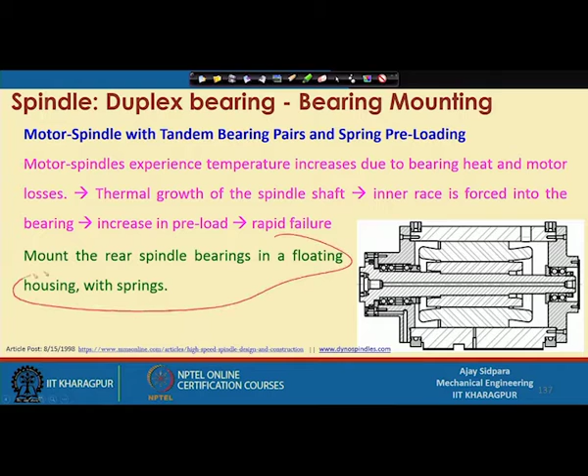In the last class we saw that whenever there is high temperature rise, heat is generated, and because of that heat generation there is growth of the spindle shaft. So we have to do something new, called the floating housing with a spring. Let us see this in detail.

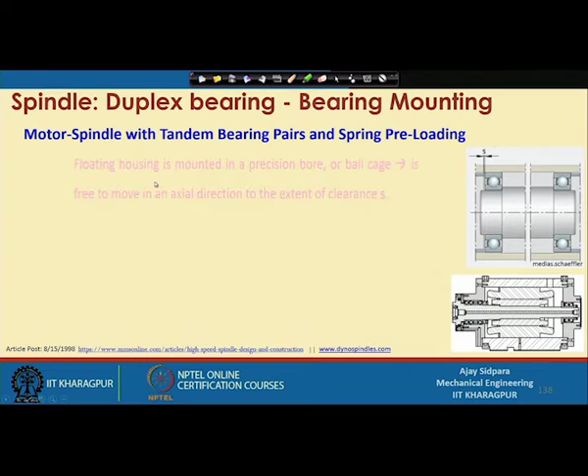This is the same configuration here. Now what we have to do is mount the floating housing in a precision bore or a ball cage, free to move in axial direction to the extent of clearance S. This is called the clearance S.

This clearance is given to the rear end of the housing. This is the front end, and this is actually the opposite, the rear end. Our tool is located at the front, and we give a small amount of clearance at the rear direction, because we have to provide this additional space so that whenever there is thermal growth of the shaft, it will be accommodated within this dimension. So you will not get any extra loading, compression, or expansion of components during operation of the spindle.

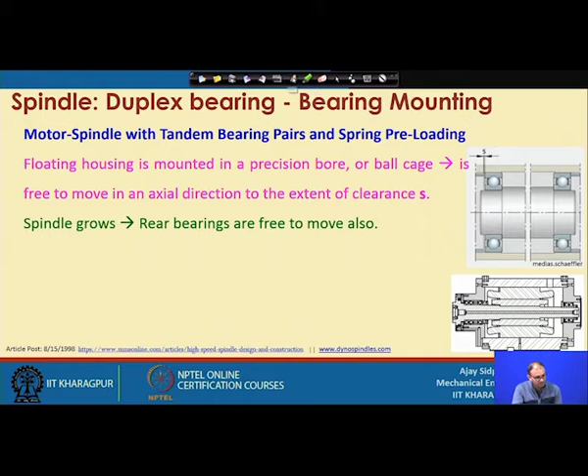So when the spindle grows, the rear bearings are free to move also. This is like the cantilever example we saw, where one end is fixed. This end is fixed because we are using a cutting tool here. If there is expansion in the cutting tool direction, your Z axis will be compromised because the Z axis offset will change. So we are not doing anything at that side; this whole bearing is completely firm and rigid.

So expansion will happen at the rear end only, meaning your rear bearing is free to move. Whatever this S is, that much amount of space is available for the rear end to move in that direction.

In this way, the preload seen by the bearing does not change, and it is maintained by the force exerted by the spring. We are using spring preloading here along with that gap. Whenever there is expansion, the spring will be further loaded, and that is compensated. Once the temperature comes down to the required level, the shaft will again contract, but since you have a spring loaded here...

...the spring again gets released and maintains the original position, but it should stay within this S value, which is only a few microns. That much variation is acceptable for this type of setting.

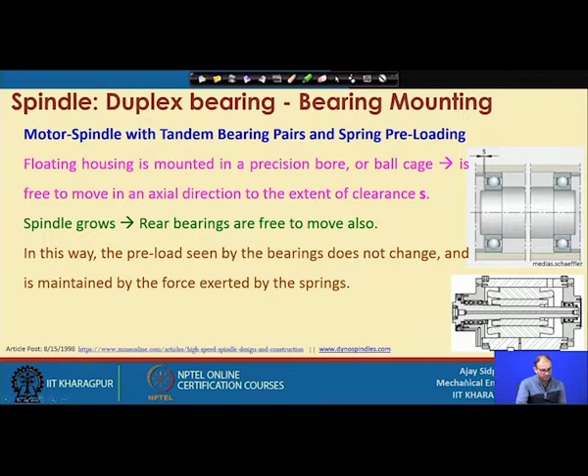This is used for high speed milling spindles and grinding spindles, because here we do not want to disturb the system due to heat. Heat is one of the things we have to maintain or regulate so that there is no thermal deformation of the component or tool, or any geometric inaccuracies.

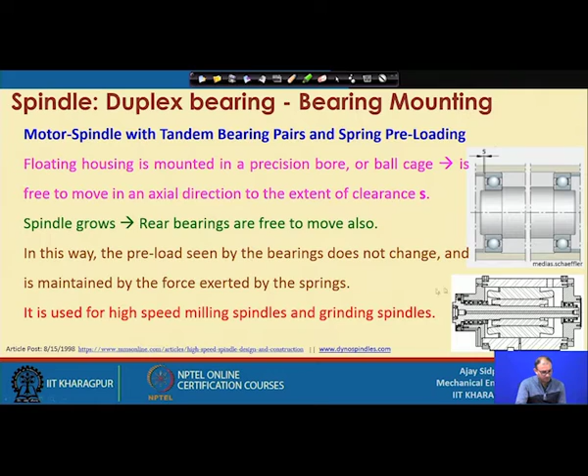Now coming to hybrid ceramic bearings. Till now we were discussing ball bearings where the races are made of steel, and the ball is also made of steel in case of ball bearing.

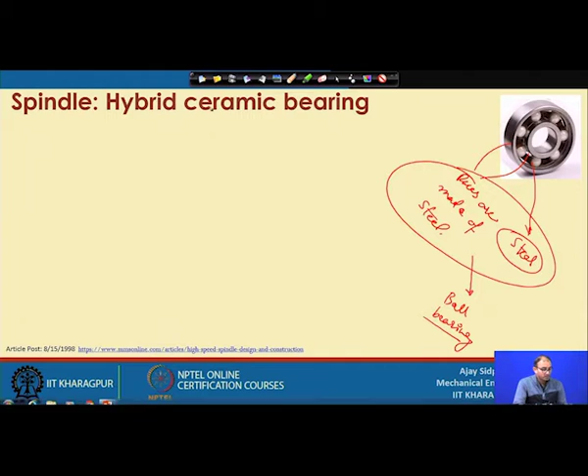But now we are talking about hybrid ceramic bearings. Why hybrid ceramic? Because we are using a ball of ceramic material, while the race is made of steel. That is why it is called hybrid ceramic bearings.

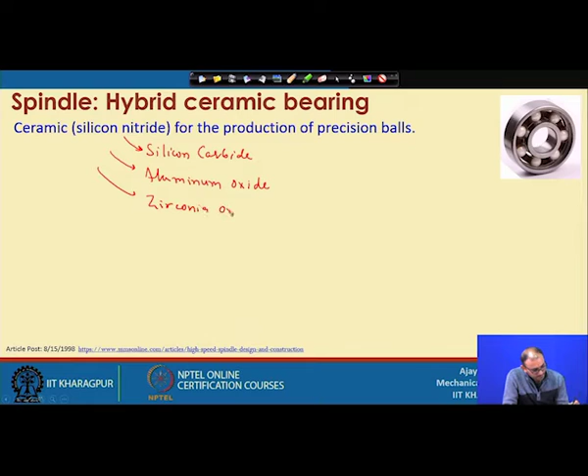Ceramic silicon nitride - not only silicon nitride, there are many other ceramic materials used. Silicon nitride is there, then silicon carbide, then aluminum oxide, and zirconia oxide is one also. So these are the different types of ceramic materials which are mostly used for fabrication of these precision balls.

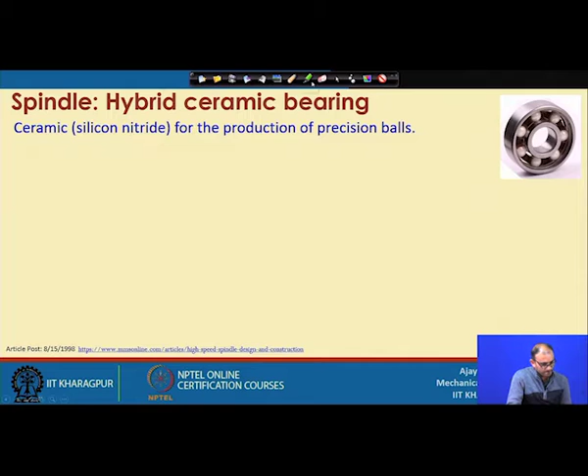Ceramic balls are 60% lighter than steel balls. So why is this important? Because we know that if things are lighter, you can actually increase the speed beyond a certain limit.

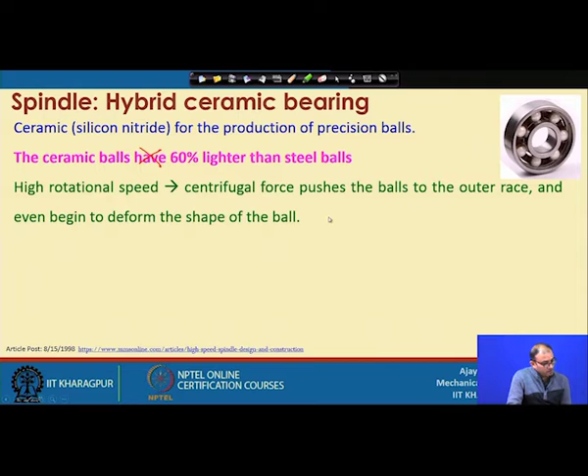For high rotational speed, centrifugal force pushes the ball to the outer race and even begins to deform the shape of the ball, because centrifugal force Fc we can write as m omega square r. So this is the radius, this is the speed, and this is the mass.

We are not actually doing anything with the radius - the size is the same, so this r is not changing. We are not changing the speed either, so omega, whatever rotational speed there is, remains the same. But we are changing the mass - now it is 60% less weight.

Now if you use centrifugal force with the steel ball, what is going to happen? You have a ball here, and when rotating, it will go in this direction. So what is happening is that centrifugal force pushes the ball onto the outer race.

So you have this ball, and it will be moved toward this particular part because of the centrifugal force. You have the outer race and the ball, and this ball is striking in this direction continuously pushing. So you get additional force on the top part of the inner face of the outer race, and because of that you get deformation of the ball.

So which one is actually creating problems? Sometimes it will deform the ball, sometimes it will deform the outer race. That is the reason for problems in the particular ball bearing. Whenever using a ball bearing, it will create a problem with the outer shape of the ball or the surface profile of the outer race.

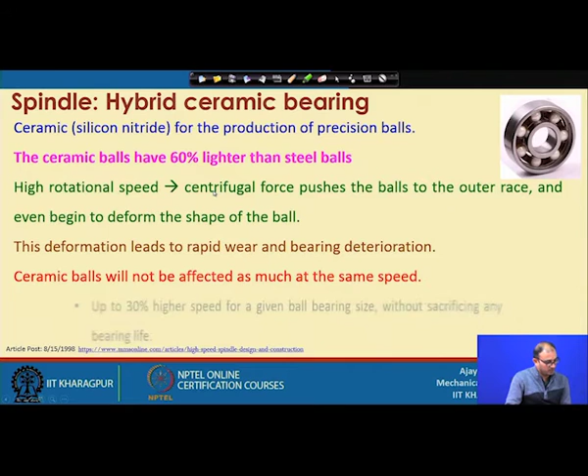So now you know you can expand that particular speed range. Earlier the range was fixed or limited, but now you can expand it to a certain higher level without creating any problem. By using a ceramic ball, you can go up to 30% higher speed for a given bearing size without sacrificing any bearing life.

So what does it mean? Without changing anything, just by replacing the steel ball with the ceramic ball, you can increase the speed by 30% without changing anything else. You keep the application everything the same, and you will still get the same bearing life but with increased speed. That is a very good advantage, because in micro machining our speed requirement is very high, and this is one of the best ways to achieve this without changing many other things.

You can see here that we have just changed the balls only, but we are still using steel. That is why it is called the hybrid ceramic bearing. But bearings are also available that are fully ceramic bearings - these are called...

full ceramic or complete ceramic bearings. If you see here, the race - outer race, inner race, everything is made of ceramic. If you consider this, whatever advantage you get for the hybrid bearing will be even higher in this case.

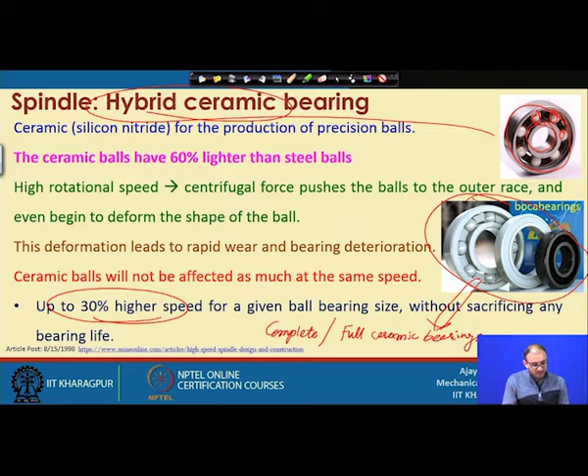Let us see those things one by one. So one thing is that they are lighter.

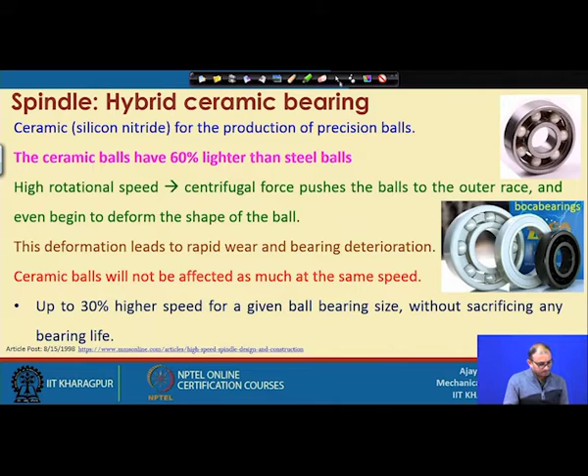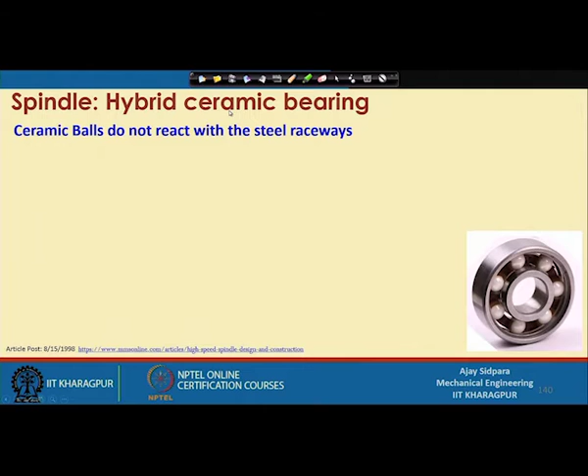And second thing is that ceramic balls do not react with the steel races, because these are ceramic material and mostly they are inert with the other acidic environment or some other things. So that is the big advantage here, because when you are using a normal ball bearing, what was the problem?

One of the most prominent mechanisms of bearing failure is the surface wear created by microscopic cold welding. What is this cold welding? When you have a normal ball bearing, what happens when you rotate at extremely high RPM? These are the contacts, mostly point contacts, but there are many point contacts depending on how many balls are located in that particular bearing. So when you are rotating at extremely high RPM, there is heat generation, and because of this heat generation, it cold welds with the inner races and outers. Cold weld means it is not like a permanent welding, but a temporary attachment between the ball and inner races.

So it is a temporary attachment of ball with races. It will temporarily attach because of this extremely high speed and high heat generation, and that is creating a problem, actually causing some type of removal of material. In this condition, if you continue this operation, this weld will break at a later stage when operating, and when the bearing rotates, this weld will be removed, creating surface roughness, which leads to heat generation and bearing failure.

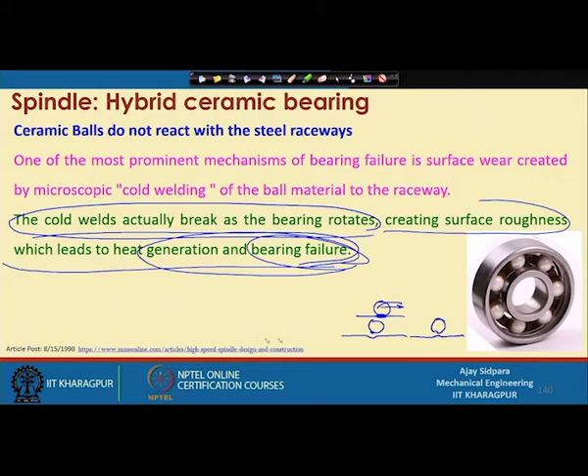In both cases this is the problem, but it happens microscopically, though it is still enough to create damage to the ball bearing, and finally everything fails at a later stage. Ceramic materials drastically reduce this mechanism, resulting in longer bearing life, because ceramic is a different material with different properties compared to the metallic surface. So it will not create this type of cold weld between the races and the ball. That is one of the advantages.

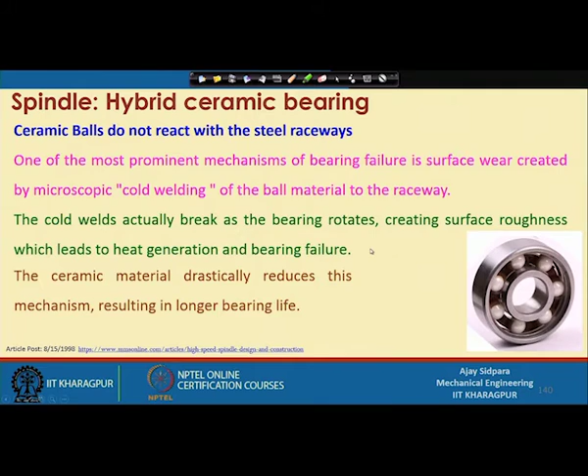Ceramic ball bearings operate at a lower temperature because they are mostly near perfectly rounded, almost like a glass-like surface. It is a glass-like surface, very shiny, and looks almost like glass. So you get very tight tolerances in terms of roundness and surface roughness.

So it operates at a much lower temperature than the steel ball, because polishing of the steel ball is very difficult compared to the ceramic ball. Dimensional accuracy is more controlled in the ceramic ball bearing, and because of that you may not get a higher temperature zone. So it will operate at a much lower temperature than the regular ball bearing.

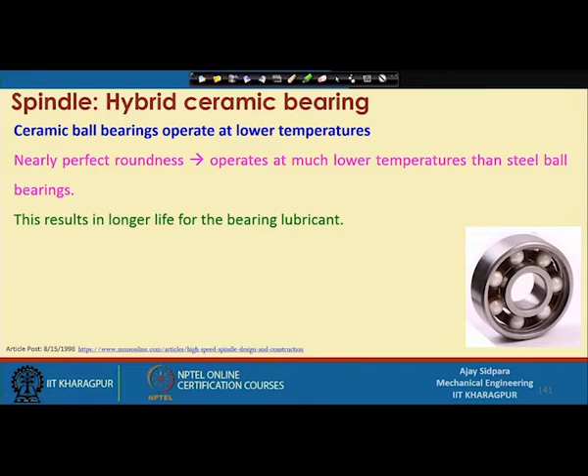This results in a longer life of the bearing lubricant, because wherever you are using bearing lubricant, if the temperature is very high, the lubricant will change its property, mostly its viscosity. Higher temperature leads to lower viscosity.

Because of that, you are changing the property of the lubricant, and sometimes the lubricant becomes ineffective in the complete dissipation of heat and reducing the friction. So it will not create a problem if you are using a ceramic ball instead of a steel ball.

So less friction is generated in the bearing, which increases with increase in heat. So when you go higher and higher in terms of speed, it will generate heat, but it will not create so much friction in this case, because now the systems are different, not a steel bearing.

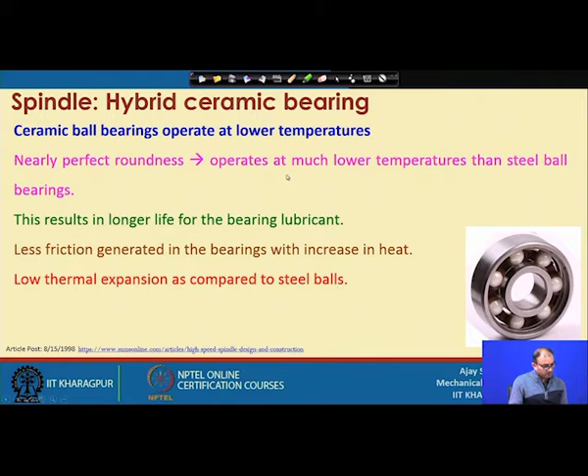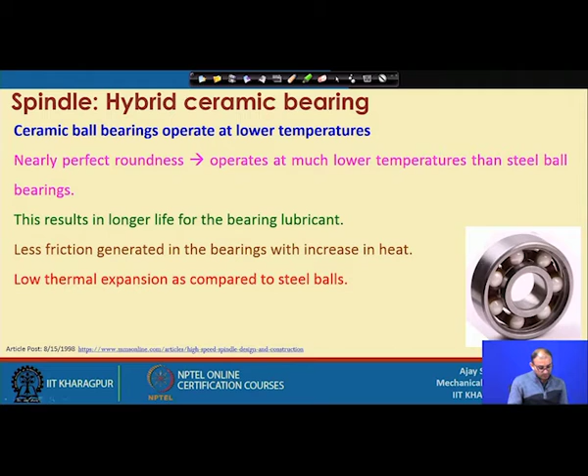Low thermal expansion as compared to the steel ball, because ceramics have a very low thermal coefficient of expansion compared to steel. So even if there is high temperature, you will not get thermal growth of the system, that means the different components of the bearing. So that is also an advantage.

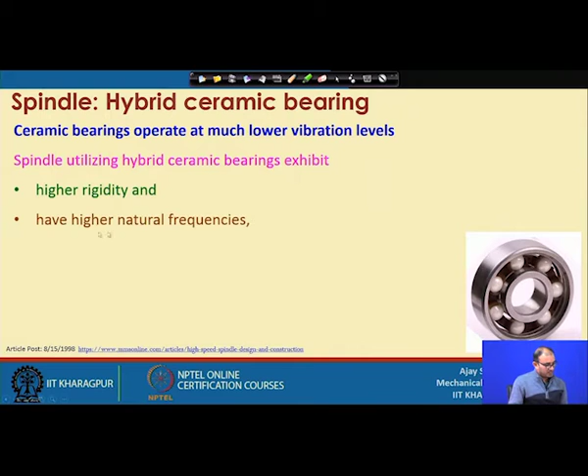They operate at a much lower vibration level, because spindles utilizing hybrid ceramic bearings exhibit higher rigidity, because they are very strong in terms of mechanical properties, and they have higher natural frequencies. So you can go beyond a certain speed limit so that your natural frequency does not reach resonance of the system.

Making them less sensitive to vibration, because if your system is not rigid, then after crossing a certain speed level, it will start wobbling because of the internal creation of clearances, and that is not happening in this particular case.

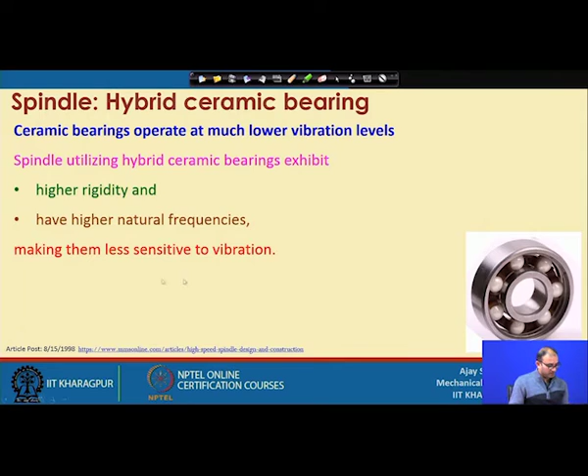Some other advantages of using ceramic balls: they have low thermal conductivity, which reduces the amount of heat absorbed, which reduces the cooling system requirement. We will see in one animation that you have to cool the spindle also, either by air or by a water jacket. So in this case, if it is not absorbing or saving the heat within the body, it will mostly release the heat into the atmosphere through different cooling systems.

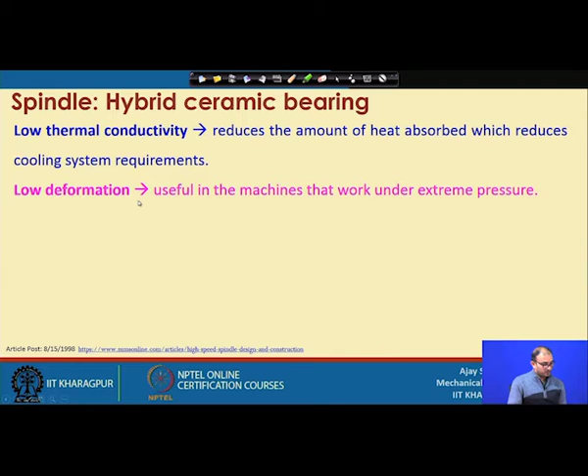Low deformation, because they are very strong in terms of stiffness, useful for machines that work under extreme pressures, and high temperature hardness as compared to steel, because it retains strength and hardness up to 1800 Fahrenheit. So in this case you can get very high temperature operation without creating any problems. And another property: the density is very low, it is 60% lighter than steel.

That is the advantage here. Very high flexural strength, almost 1 GPa, so when under flexural loading it will not create any problem. And high fracture toughness, 6 MPa root meter.

So these are some of the properties which are very suitable for using ceramic or hybrid ceramic bearings for micro machining operations. That is the reason it is better to go with this type of ceramic bearing whenever you are using a spindle for micro machining operations.

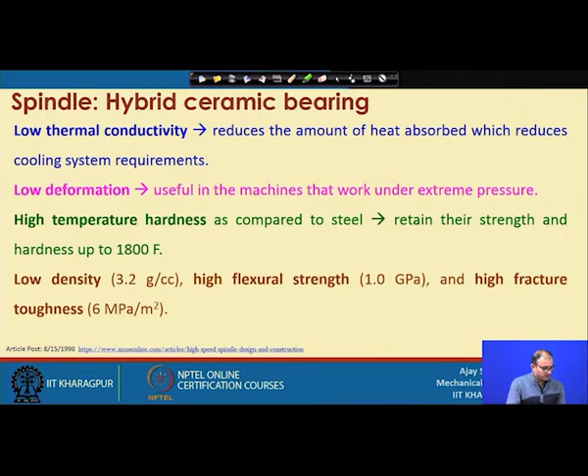So now let us see the complete assembly of the bearing. These are the two things we have to take care of during the design of this part.

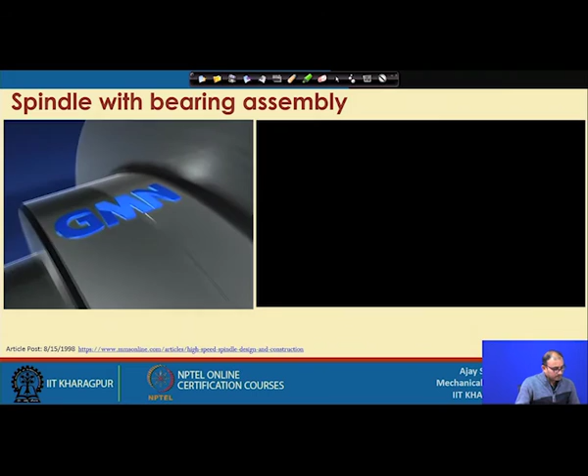This is one of the companies making this type of high precision spindle, and this is the cross sectional view or section view of this particular spindle.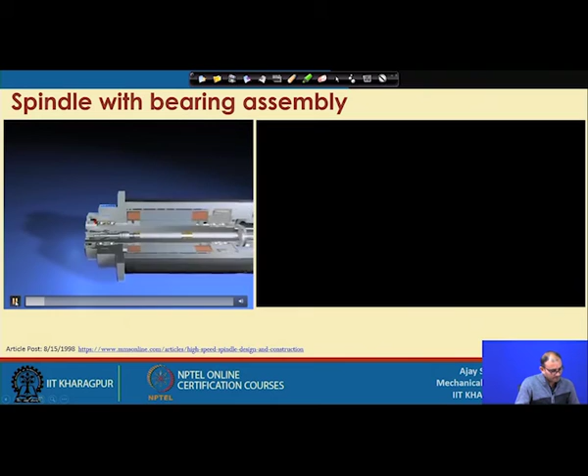Now you can see there are a lot of bearings. These are the set of bearings, this is called the front bearing and these are called the rear end bearing. Right, so there is liquid cooling of the bearing components and the motor.

Now you can see this blue color, this is called the liquid water jacket which is created within the system. You can see that a liquid jacket is given to the bearing also, and the other is the full components here, because this is an integrated or integral motor type spindle. So everything is within the system, the motor is also there, and the transmission components are also within the part.

So this is one of the systems where, when you cut the material, chips are forming and spreading in random directions. One of the ways to ensure chips do not actually attach to the tool is important, because when working with a micro tool, the flute space is also very small. So if material gets fixed, or if there is loading of the tool, the chip will stay on the cutting tool.

If you are providing coolant through this particular part, you are actually focusing the coolant to the exact location where material is being removed. So the chip will not come into contact with the flutes or any other direction, and it will spread away very quickly out of the machining area. So coolant goes through the shaft and the spindle housing. This is one of the ways.

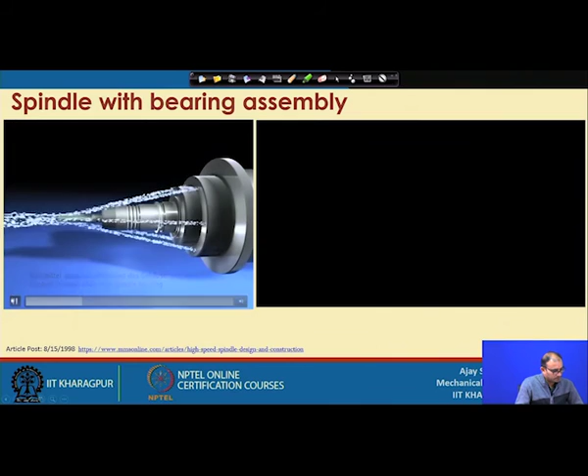Now coming to the tool retention mechanism, or tool holder mechanism. So when you are putting this particular tool in, as we discussed some time ago, this is called the drawbar mechanism. When it is expanded, you can push this particular cutting tool holder into it, and it is going down and getting inserted inside.

This is called the automatic tool change and drawbar monitoring system. It will tell you that you are measuring the forces and the contact forces. Once everything is firmly contacted, then you will get the signal also. So this is the automatic drawbar monitoring system.

This is the rear end of the drawbar, where you are actually moving this particular bar to grip the tool.

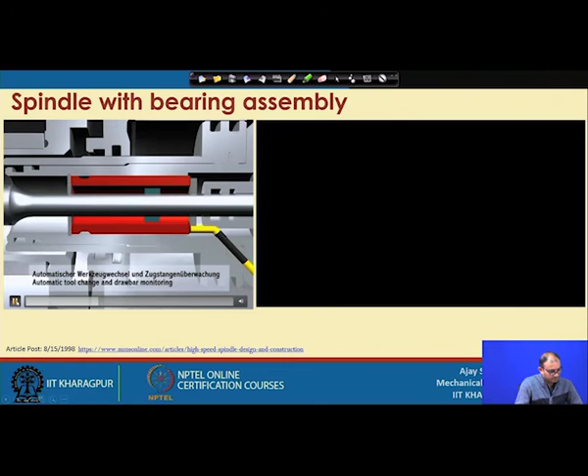So now you are releasing the system.

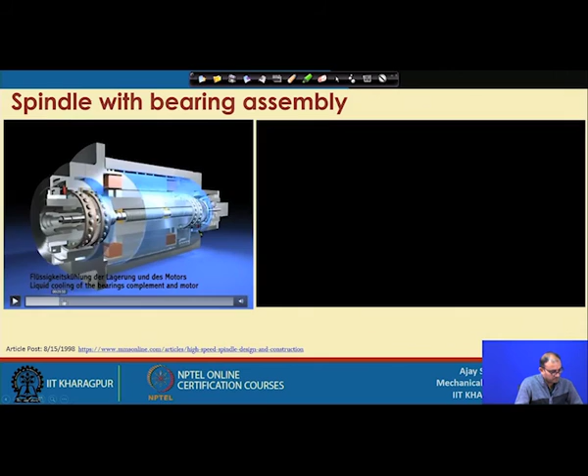Now it is gripped, and now you can remove this part. So now it is released from this part. For attaching and relieving, you can do the same thing.

Now another thing: once when you put it inside and when you relieve it, sometimes some microchips or foreign dirt particles will stick to the surface. If you do not clean this part, the next time you are attaching another tool, it will not be fixed completely here, and because of that you will get run out. That is called the periodic run out or the static run out.

Some spindles have this type of additional mechanism by which, once the spindle or tool holder is released, you provide a type of taper cleaning of the tool interface using air. You supply the air, and the air gets a positive pressure, so its pressure is very high here.

When you are pushing the air here, the air will come out from this particular passage to the atmosphere. So even if there are some dirt particles or foreign elements which could create problems at the interface, they will be expelled away from this zone. That is the automatic tool cleaning of the tool interface by air.

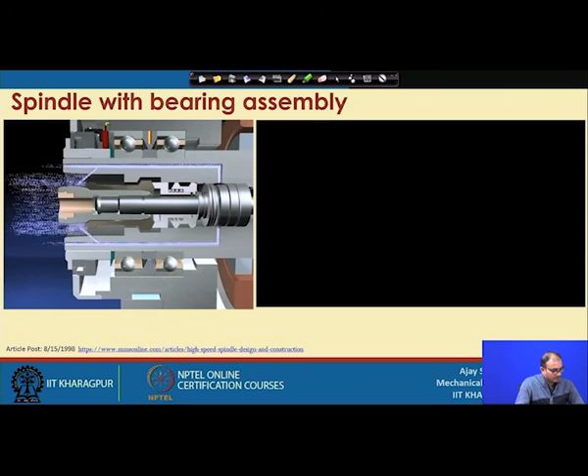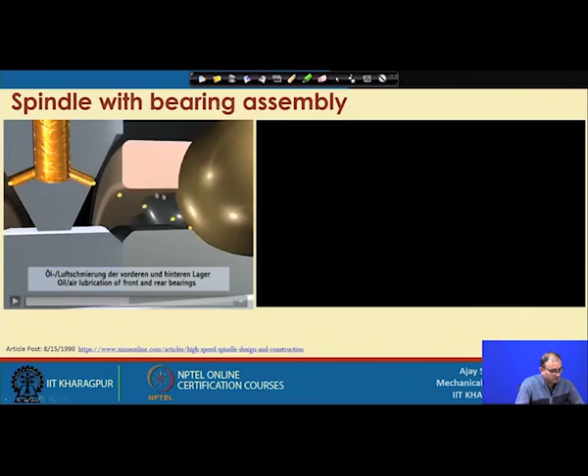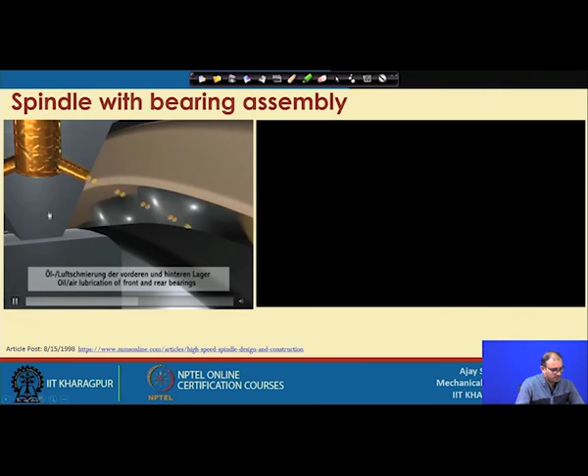Now, coming to the bearing lubrication. There are different methods available, and this is one of them showing here. It is oil or air lubrication of the front and rear bearing. It provides one completely oil monitoring system here, which will provide continuous oil supply to the bearing races, drop by drop, so everything will be lubricated within the system. Once the bearing is rotated, you will get lubrication of the balls as well as some other components continuously.

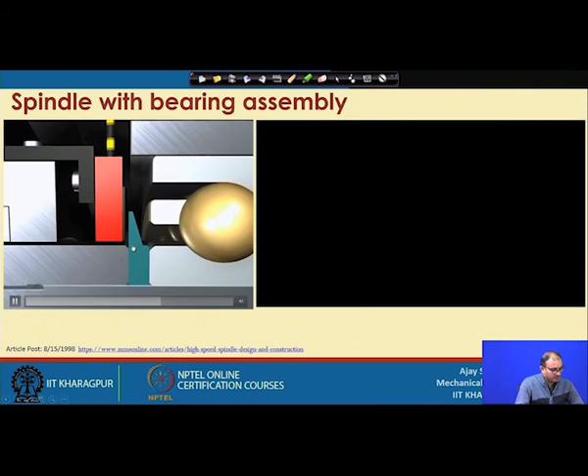This is the sensor for measuring the axial shaft movement. Your shaft moves in this direction, and how much it moves is important, mostly when talking about drilling a hole, doing micro drilling, or some other operation where it will create a problem at a later stage. It is mostly some type of capacitive sensor or Hall effect sensor, which will monitor how much the axial displacement of the shaft is. Every time it will give a signal to the system, so that you can maintain or monitor this particular signal.

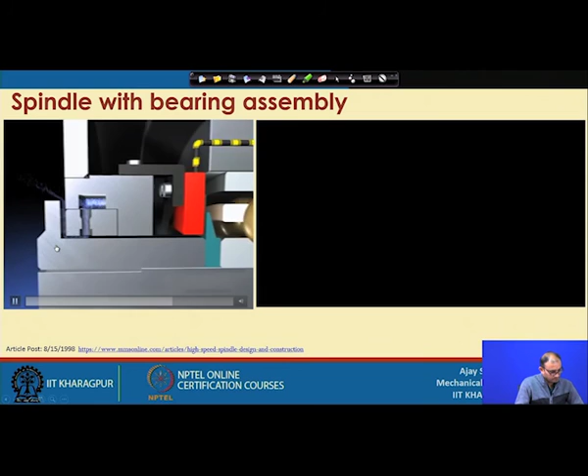This is the air purge, because whenever you are doing machining, you may get very fine particles because of the machining, as well as some chips. This air purge makes sure that none of these things actually get inside the system. We continuously provide this air purge so that nothing comes inside the system, and the system is completely secured from the coolant as well as external elements like chips, dirt, or other microscopic elements.

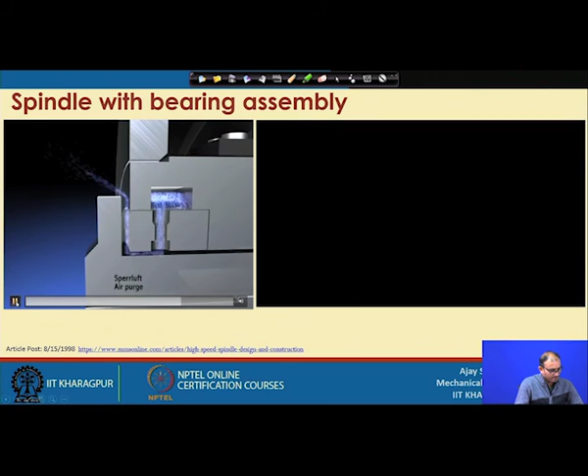And this is the rotary encoder, which is used for measurement or calculation of the rotational speed of the shaft. But here we are using a rotary encoder because we want to measure the rotational speed only. That is the best way for doing this.

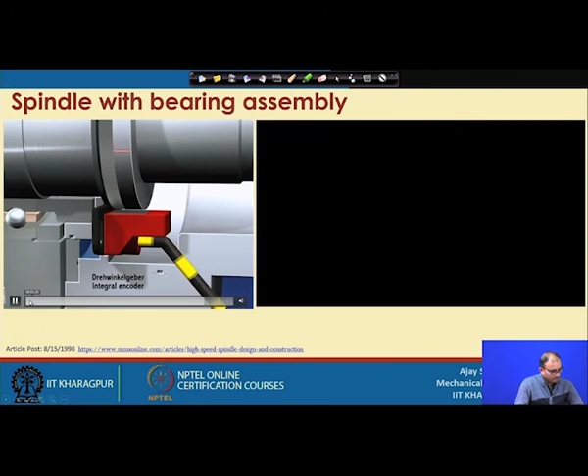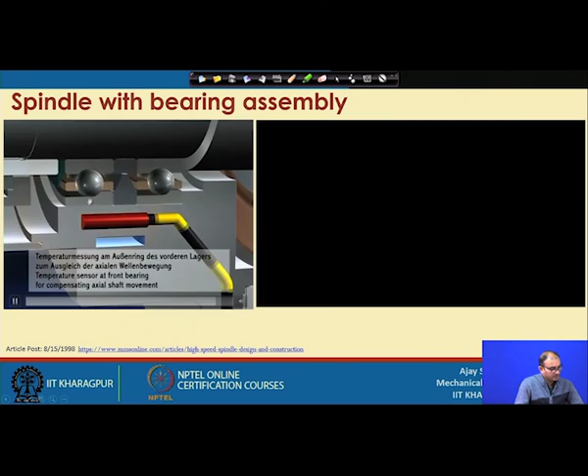Temperature sensors are also attached here, so that whatever axial movement or something occurs will be compensated within the part. So this is all about one system, and let us see this one more.

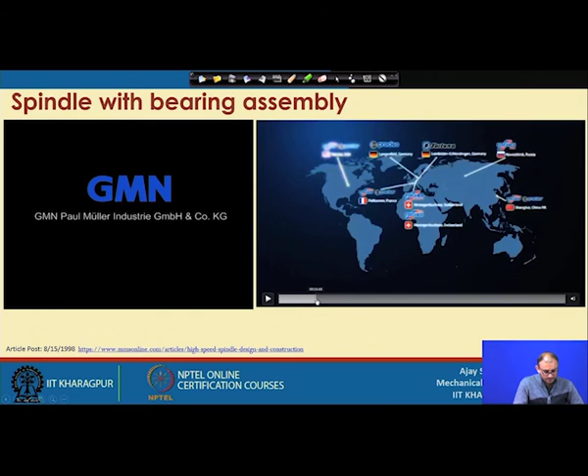So, this is also one other company, Fischer.

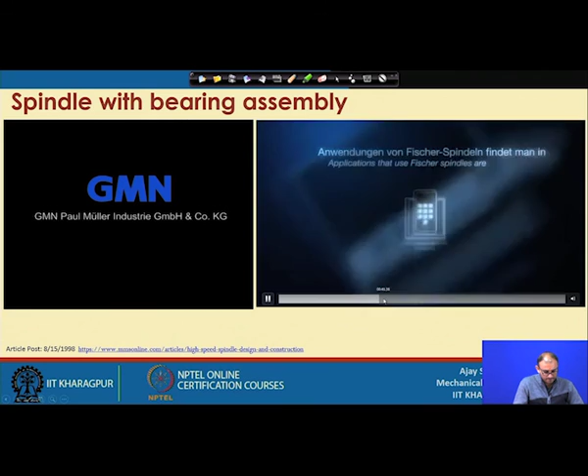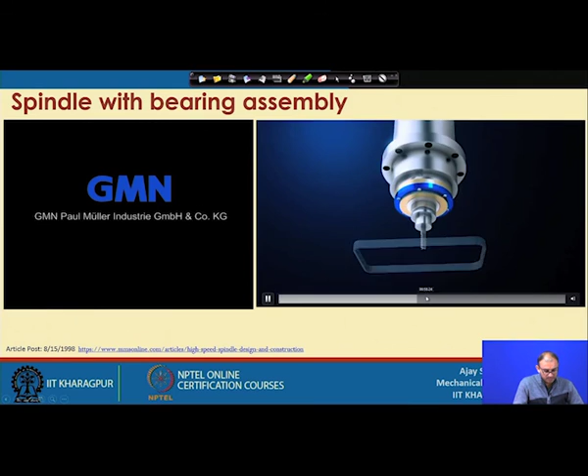Whenever you do machining or something, you always get some heat generated within the system. So what do you have to do to counteract those types of things? You will get some type of Z displacement because of the heat. So what is the solution for that?

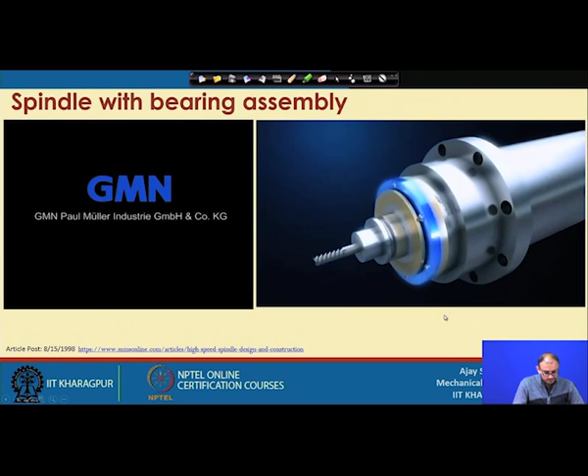This is again the cross section of the whole system, and this is the cooling channel. Several channels cool the shaft, so temperature changes and axial growth are almost eliminated. These are the shaft cooling systems, because we know that thermal growth mostly happens to the shaft. So if you want to avoid thermal growth, you have to cool the shaft during the operation, so that you will not get thermal expansion.

And this is for the bearing and the motor. Again you are getting the same water jacket cooling or air cooling, by means of which you can maintain the temperature within the system.

And optimized air or oil lubrication guarantees minimum losses, maximum speed, availability and reliability. So you can maintain this, and your system can operate continuously without any problem.

So this is the greasing unit. You continuously provide greasing also to the bearing and different other components, so it can reduce friction. And this is the sealing of the spindle.

So this is one of the ways through which, through the tool, you can actually provide different kinds of fluid for internal tool cooling at maximum speed. Even without restricting the speed of the spindle, you can provide cooling lubricant through this particular spindle. You can go with minimum quantity lubrication also, where you give a very minute amount of coolant supply, so you can do some type of cost cutting.

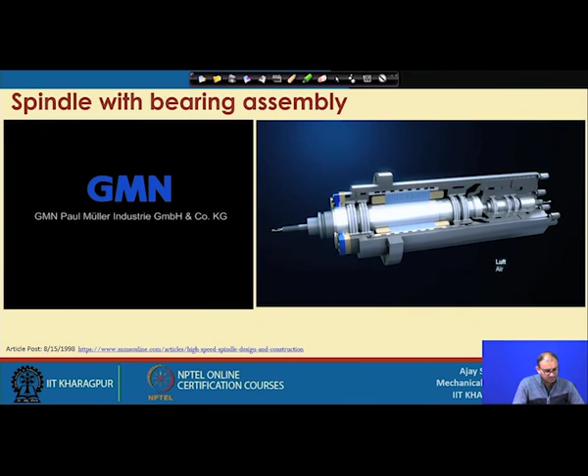And another option is to supply air also. So these are the different ways you can actually control the system.

So now we have seen different components of the bearing and the installation of the bearing within the system, and this whole system shows how the bearings and other things are assembled within the spindle, and what you have to take care of during operation. So let me stop at this location. We will continue our discussion on the spindle component or machine tool component in the next class. Thank you very much.